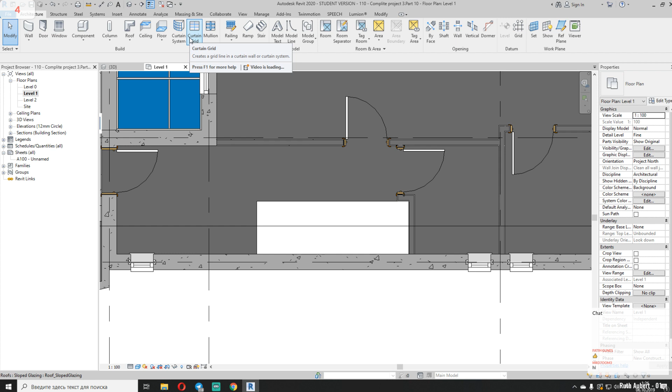And yes, you'll ask me later, I'm pretty sure — I will post this video on my channel. Yes, I will. So if you want to go sleep, it's okay, you can go, and tomorrow you'll see this video on my channel. What I want to check is this view, let's go to this view. Oh my god, we have a lot of work. And the other question — will I share this project or not? Yes, I will share this project, no worries guys. Later on, when I finish it all, you'll be able to download it for free, of course. I won't take any penny from you, no worries about that.

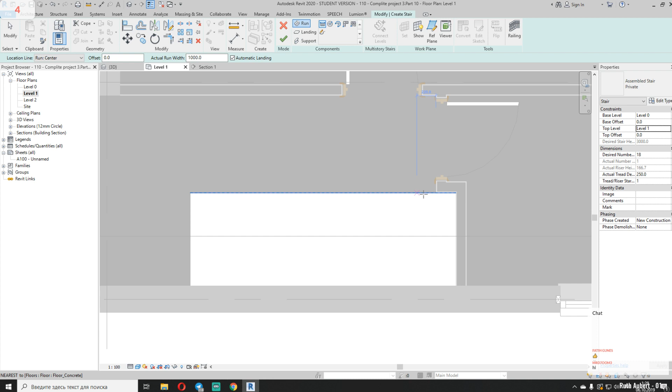Okay, from the 0 level, let's say I'll change to 150. From the 0 level to level 1, my stair should go. Okay, let's go to level 1. I'll find my stair, going from the 0 level to level 1. For level 1, I say it's commercial, private, or residential — which one? Let's use private. And I need to create — oh, as you can see, my stair is going from the middle. I need to use not the middle, but the left side or the right side, we'll see. Right side. Okay, I need the left side. Okay, here's the left side, and as you can see, my stair is pretty much big, I don't like it. Let's go to 3D, and as you can see, my stair is actually going — oh, I understand why, because my stair has the wrong position. This is pretty interesting, I need to solve it. Let's go here, I think it's going like that.

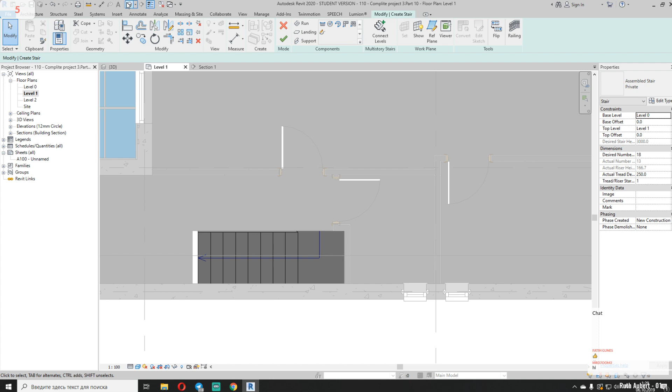Let's make it. Oh, it's a bit hard, but we will check it later on. I will go to 3D now because I want to see where's my stair. Here's my stair, but it doesn't look like I want.

Where's my section box? I want to see my section box. Right click, unhide. Where's the unhide and view element? Let's see how it looks, because I don't remember this building already.

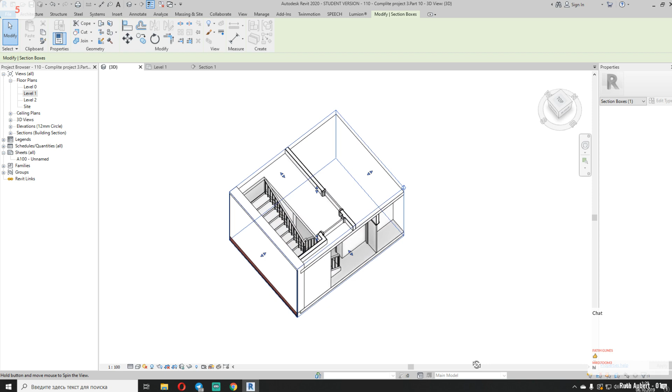We've already been doing this building for a long time. I found it. Okay, so it's not nice at all.

As you can see, here is my wall, and actually there's not enough space for this stair. It should be just straight. Oh, it will be pretty high. Anyway, I will do that.

Where's my stair? From that side, where's the left side? From 0 to the 1, and from this part to that part.

So how many stairs do I need? You cannot see because it's the same color. I need 13 stairs, yes, from that part to that one.

Let's go to the section. Actually now the rise is pretty high. Let me check it. Rise now - no, it's okay, it's not so much. For a private house it's not so much. I'm thinking it's really huge, but it's not.

Okay, I need this riser. Okay, like that. Done, we did our stair finally, and it looks not bad.

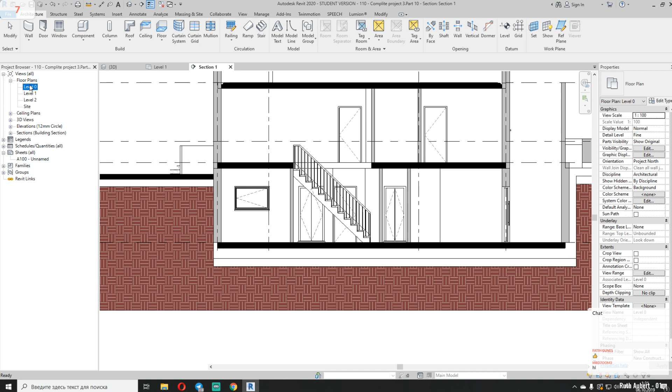Let's go to level 0, and as you can see here I have something like a plan. Actually this is a drafting plan from the last version of my project. I spent maybe 1 week on it, around 1 week for all these plans and design everything.

And we will do something like that. I won't copy it, we will just do something similar. Okay, here is my level. As you can see, here is level 0.

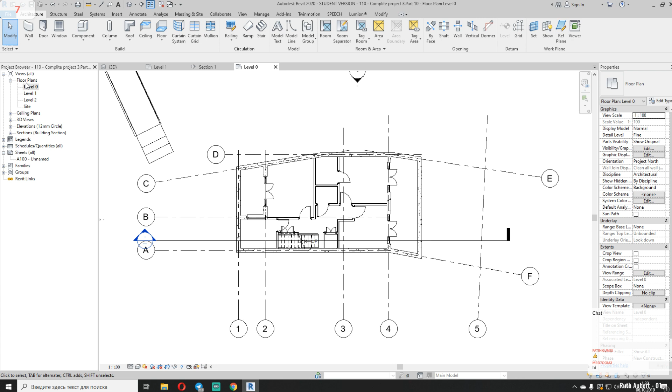First thing I want to do is create a new type of plan, because as you can see now all my plans are floor plans 0, level 1, level 2, and site. And I can't put this on my list because this is a working view. I want to create a design view or views which will go on my list.

So let's right click here, duplicate view, just duplicate, and I'll rename this view. I'll call this view level 0 to documentation.

I will copy this view too, without detailing, and rename it to documentation. You have a lot of ways to do that, but I don't want to spend time. This is a small project. I am working alone on this project, so I can do whatever I want.

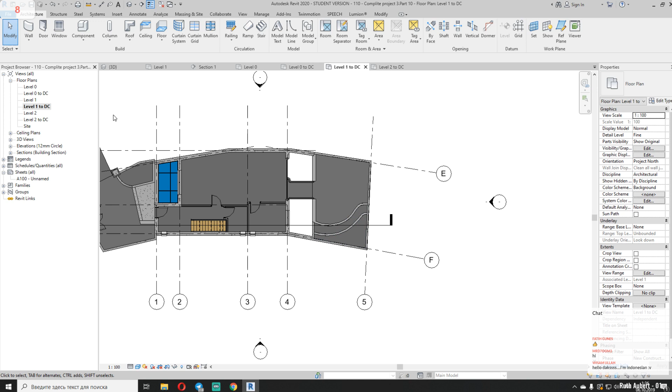This is not documentation. Level 1, let's go to level 1 and I'll show you the tricky way. As you can see, when you're changing these grids, it's changing everywhere. But on level 0, I want to change it more closely to my plan. How can I do that more on the right way?

Just select your grid, uncheck 3D, and now change position. Now it will change only in this view, nowhere else. Let's see the difference. As you can see, it's still in the same position, but here it's more closely.

I'll change my scale from 1 to 50, because this is pretty much better for me. The same thing here, I will select all of them, or just one by one - 2D, 2D, 2D, and 2D. And I'll change position of that, and the last one.

This is much better. I don't know, this is actually about the taste, but on my taste I like that one. But you should follow the rules of your government, of course, when you're doing documentation. Okay, we did it.

Let's now work with the graphics. We have a lot of work with the graphics, as you can see. One thing - I should do something with this door, because this door now connects with that door, this is so bad. We should do something with that. And as you can see, we don't have enough space on this side, so we should do something here too. Let's start one by one.

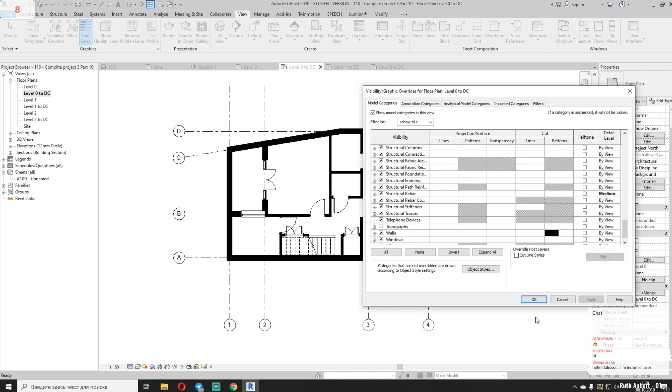Okay, all the walls which will be cut - our walls are cut. The lines we will leave as they are, but patterns will be black. For patterns, I want to use the black one, like this. Let's say okay, let's apply it. And as you can see, now everything is black.

Now I will go to graphics and select smooth lines, because now it looks nicer, more professional. Okay, so as you can see here I have the lines, but I don't like the lines because I know here will be dash lines.

So what we're gonna do is change these lines too, but we will do it later on. First I want to change this type of this family. I will go to edit family. Let's see the floor plan of this family. I will close everything because I don't want to see anything. And I need 30 degrees of this.

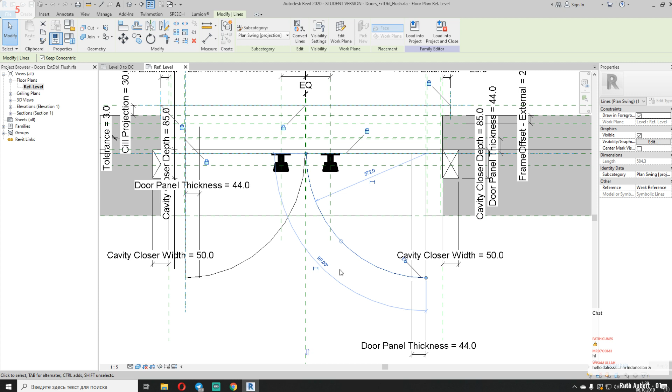Where is that? We should find it - 30 degrees, I cannot find it. 45, I need actually. Where is this line? Line is here.

Okay, I need to create something like that, but how can I control it, because I don't have any controls here. I don't like the standard families really, because you cannot do anything with that. You should create your own, it's much better. Okay, with degrees, oh my god, trying to find something here, it's really impossible.

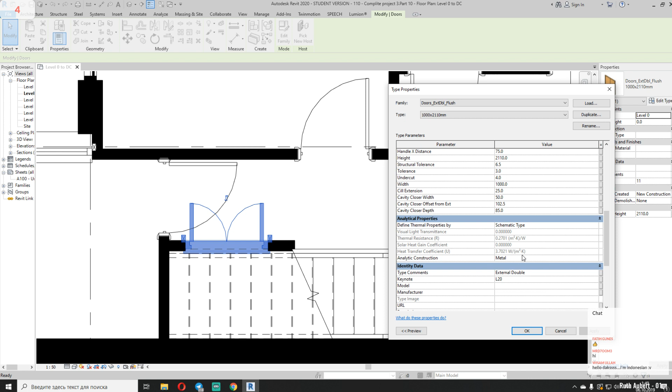Let's see what options we have. Actually, we don't have any options. I have the other options. I can make it like that, because this one is so terrible.

Okay, let's see what's going on here. Everything alright? Everything alright, I think. Yeah, everything okay. So now we should create the rooms here, because we don't have any rooms yet, as you know. I will go to architecture, find the rooms, and create the rooms. And as you can see, I cannot create the room.

As you think, why? Because I cannot see my closed boundary. Only here.

Let's see why. Here is level 0. My room, from level 0, limit offset 3000 millimeters, base offset 0 millimeters. Okay, so I don't need any tagging. Room placement automatically. And room placed was only one.

Hola amigos. I hope I said everything right.

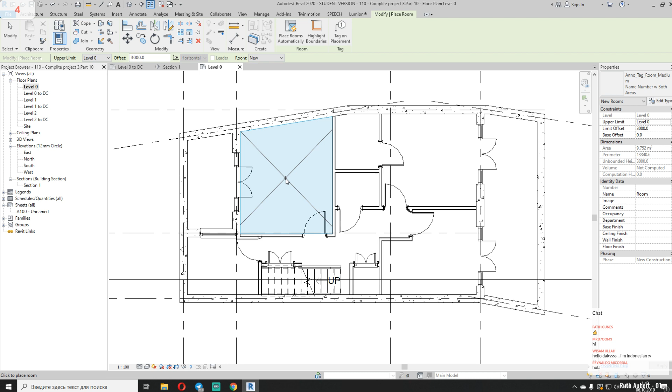So one room, the second room, and let's create the rooms. And here one more - okay, now we have the rooms. Let's go back to level 0, documentation. Now I will go to the color scheme.

Actually, I don't like the color scheme. The color scheme is only to check what's going on with my rooms - room names. As you can see, now I have only one room, of course I have only one room. And let's name this room.

Which rooms do I have? I already forgot. Let's check - okay, here I have the bedroom. Let's call it bedroom.

The right store. Here is the store, here is the ensuite.

I will not use any families, I mean like toilets or something else. It's not about the toilets or something else - we're just working with documentation only today.

Bedroom here, let's find bedroom. Actually, we already have the bedroom, just check it out like that. Here is one more bedroom.

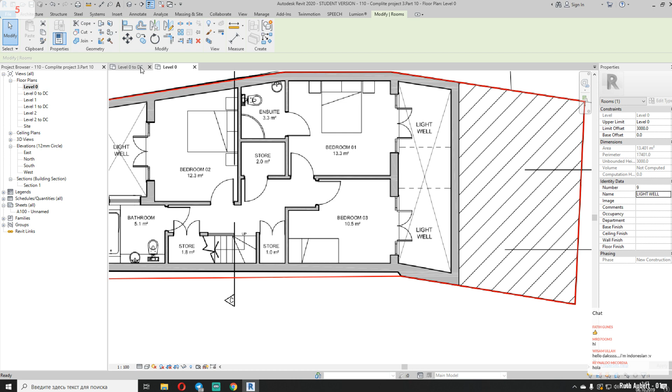And the other side also. And let's say I'll put it here. Yeah, room bounding. And let's make it light well here.

Okay, we did it. Actually, I don't need the color scheme, I don't like it at all, but we will make it more professional - when it's so colorful, I know everyone doesn't like that, but we will make it a bit more professional.

By using Pantone - let's use the Pantone, and I need to use these colors. Okay, like this, maybe even gray. I want to just use the gray colors. As you can see, we have a lot of different gray colors. I will use this gray color.

For that one, I will use cool gray. And just use some gray colors.

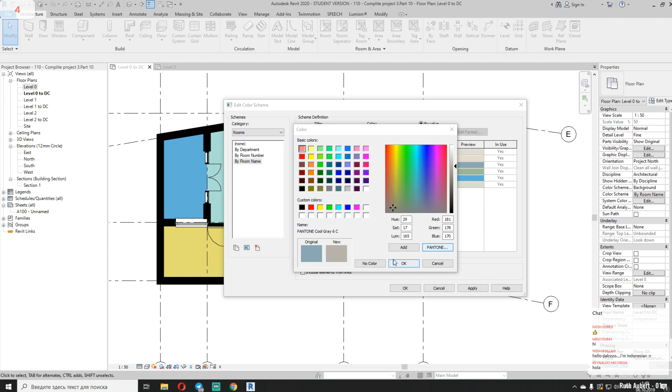It's really a better one, because the colors actually just indicate where your room is, nothing much. And actually professionals won't use the color to find your room - they will use the ID of your room. That's it, you won't see what colors they're using. Is it purple, or white-purple, or black-purple? No, they will say, this is room number something something.

Okay, I understand, thank you. And one more - let's make, yeah, why not this one?

Okay, as you can see, it's pretty much the same. I will change it to this one, and let's check it - number 4, let's check it. Everything different, as you can see. Let's apply it.

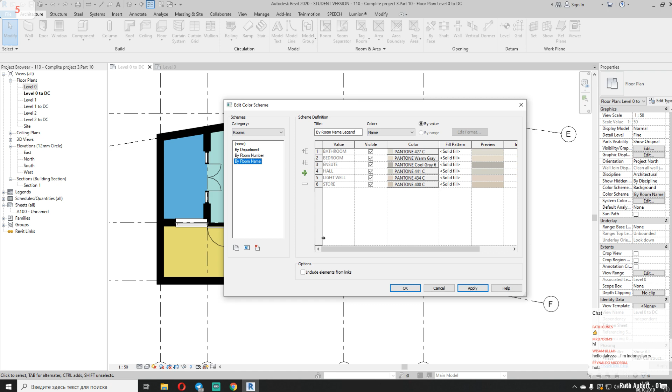We did it, this is the room name now, and we will do it by room name. Yeah, actually we can make it lighter than now, but it's not so colorful like it was before. I don't like colorful, as I said before.

Maybe I will change it later on. I want to make it even more lighter. Okay, so we're done with that.

Let's make the tagging. How can we do the tagging? We can create one tag for everything, or we can create one by one. Actually, I prefer to create one by one. Let's use the tagging room, and we already have some tags in our Revit.

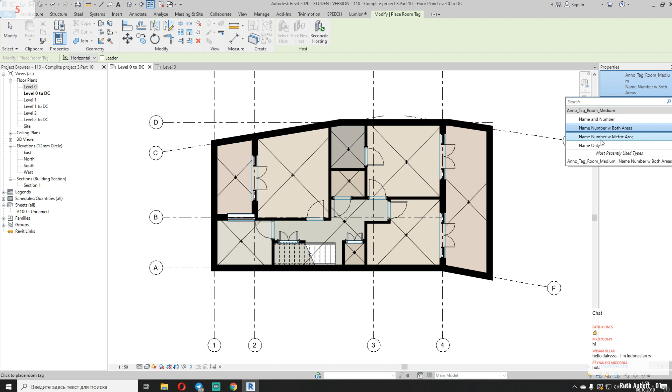Let's see how it looks like. Okay, where is my number? I cannot see. Here is number. I want to see the number of my room. But here is square feet. I will use that one, but I will change the square feet to meters.

How can I do that? As you can see inside, we cannot do that. But if we go inside to the family, here is my square feet. Here is my meters. I don't need square feet, I'll just delete it. Let's load it again back to our project, override, and now everything is alright.

But the number of my room, I don't like when it's starting from 1. It should start like, for example, level and number. Let's select that, and let's go inside to my

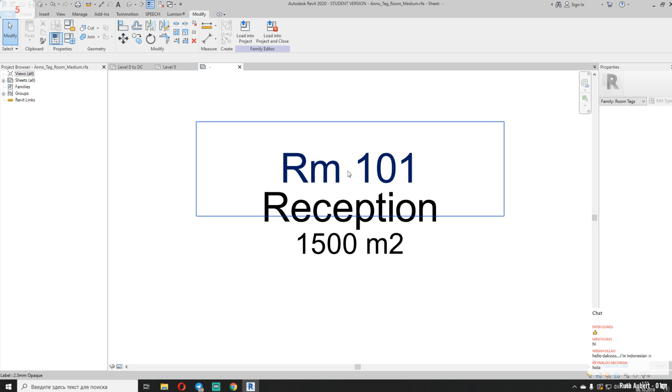family. I will click on my room number, and I will go to edit label, and you will find here the number. As you can see, we have the sample value and the prefix.

As prefix, I want to use my level. Let's use the level, I will say here will be my level. Okay, here is the level suffix, and I don't need any spaces between that. I want to use only that symbol. Let's say okay, as you can see, it will be something like that.

Let's load it inside to the project, overwrite the existing one, and as you can see now it's much better. Level 0, number 1. Okay, let's improve it again.

Nothing changed because this is my mistake. I will go back to here. Okay, here is starting, and it will start from 0. Okay, let's load inside to the project and override exactly.

Okay, this is much better, and I don't want to use this white background. Let's change it, and this is done with this family.

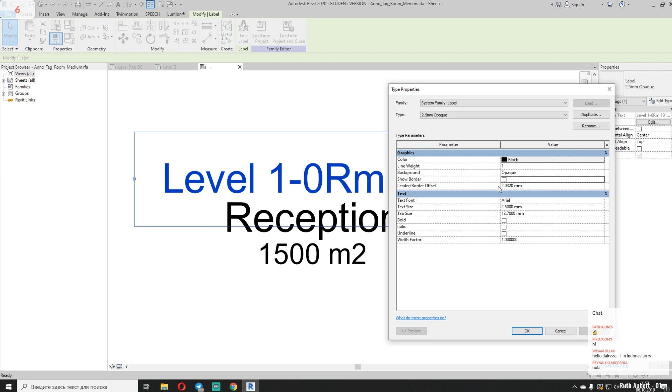Where is this white background? Show border, I don't want to see. No, it's not show border. Background transparent. Let's load inside to the project, and done.

This is what I want. As you can see, level 0, number of the room 01, bedroom, and square meters. Pretty awesome. And let's now create this room tag for all the rooms.

You can create like that, for example. Once you select that, I forgot where is this label. Give me a second. Tag rooms, I forgot where that is. Doesn't matter, let's put it manually.

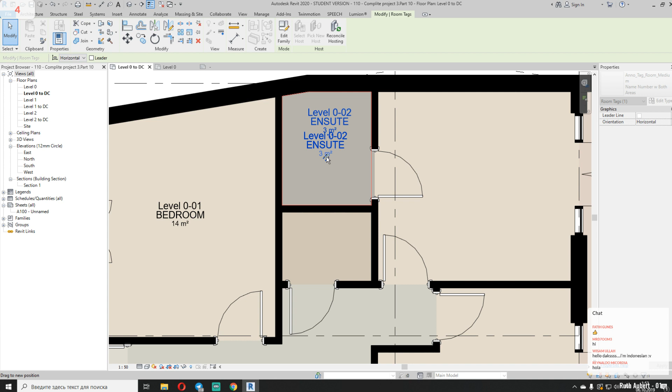Okay, here is my store. Here is my room. I prefer to do it one by one, but because maybe somewhere I will get some problems. I mean the sum maybe not right, the spelling, maybe the square meters will be not right.

So that's why I'm doing it one by one. When you have a small project, I prefer to use manual things, I mean to do everything manual, because you have small projects.

Okay, as you can see, now our plan becomes more pretty, right? Because you can see where your room is, you can see the square meters of your room, everything correct.

And now we need some simple sizes, not like everywhere, like students like to do. You know that, like students doing like that, everywhere should be size. No, don't do like that, because this is really so stupid.

You should have the sizes, only main sizes, between your, for example, your grids, of course. Here you should get the sum size, and as you can see, we cannot now put to here, we should use this grid. Okay, this is calling like overall size, so everyone will understand approximately the size of your building.

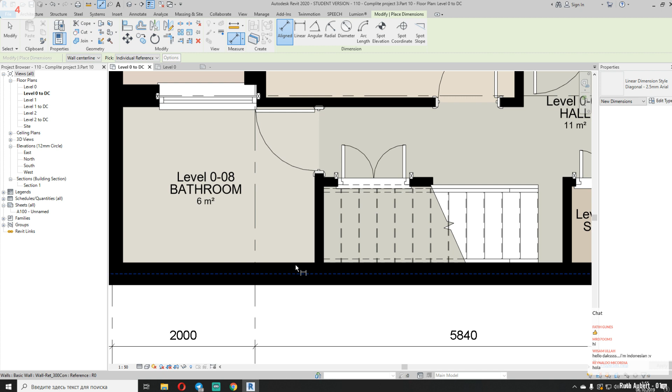And we cannot create from this wall to this wall, as you can see, and we need to create some internal sizes, only to understand how big is, for example, your room. Okay, as you can see, here I will do for the internal wall, but try to make all your sizes on one line. As you can see here, we cannot use that wall, and that's why I'm using that.

Let's select it. I don't need this one. Okay, and what I don't like actually right now, first I don't like this white color.

Let's select my dimension, and I want to see the opacity background. Where is my background here? Let's find the background, the text background. I want to see transparent. This much better. If you don't like this, you can change, of course, to some opaque and make it white, for example. But I like when it's transparent. And I will show you a bit some difference later on.

So let's create first our horizontal one sizes. For example, I want to see the distance on my corridor from this wall to this wall, from this wall to this wall. Don't do everywhere, just main sizes. Okay, here and here. No, I don't want that. And that one.

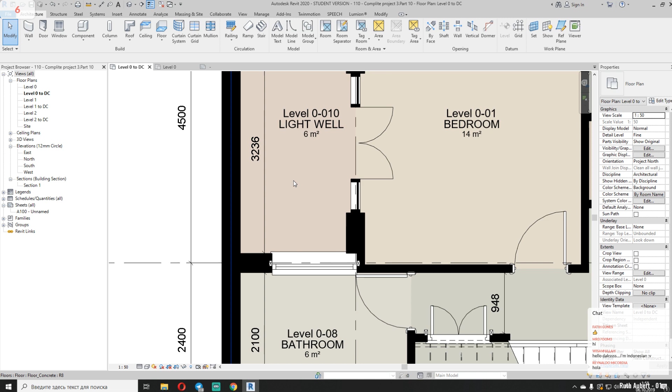As you can see, sometimes we get the so bad numbers like that one. Yes, of course, you can make it tricky, like in AutoCAD or like in, for example, ArchiCAD, but I don't prefer to make it tricky. Really, don't do that. You can make, for example, a bit rounding. For example, when you have like 1 millimeter or 2 millimeter, you can make it rounding.

I will do the round. Just I will go inside to this dimension text. Here you will find the units format, uncheck it, and we will make the nearest to 10. Let's say OK, let's apply it, and as you can see, now we get much better numbers, but we are not tricking because 4 millimeters it's not will change anything. For example, your plasterboard it's 25 millimeters, but you're tricking only 4 millimeters, so it's not bad.

But the numbers now looking really much. Actually, this building it's reconstructing, and that's why on this building it's never will be like 3100 millimeters, because the building reconstructing, actually they are already wrong. It was built before AutoCAD was born. As you understand, it's everything was measurement by hand and rulers, manually I mean. Okay, we did it.

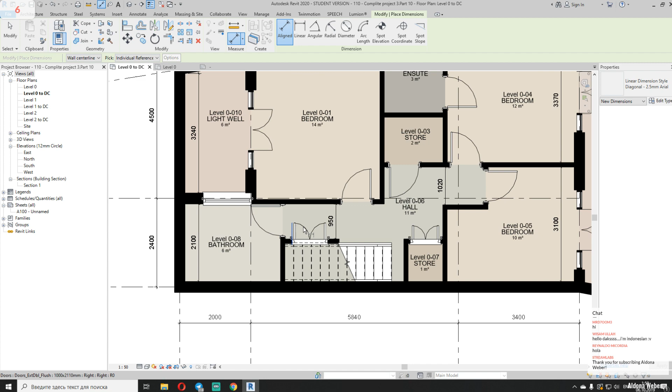Let's create some more dimensions, but as I said, not much, just a bit. For example, this store we don't need. As you can see, it's 1 meter by 1 meter. Where we need the dimensions? Okay, we need dimensions, I think, on the light well, somewhere here, and maybe we need somewhere here too, like that. Maybe I want more here.

Okay, we're done. So we have dimensions, we have our stair here, but actually what I don't like in my stair, I don't like the stair have the left railing. I will delete it, I don't need it, and I don't have enough the space to the people. Here I should have at least 600 millimeter, but as you know, here I have only 300. I need twice more. So let's make it, because it's really bad.

I will say I need 11. Oh, pretty easy. I need 11. Let's go inside to this stair. I'll select the stair. Okay, done. Now it should be enough.

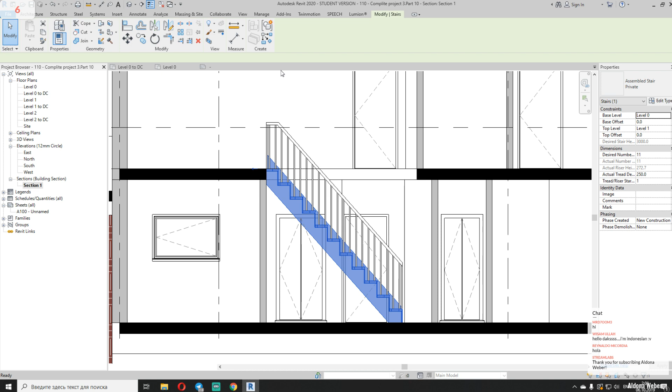Let's go to the my section view and let's check it out. Yeah, and the height 250, so it's not bad. It's not good and also not bad. My grandma cannot use this stair, but I can.

So this is building reconstructing. As I said, it was the wine storage. So as you understand, for the wine storage, you just keeping only the wine bottles here and nothing else. But now it's bedrooms. Everything changing.

Okay, we did it. But one thing, as you can see, what I like actually, the internal dimensions I like when it's smaller than external one. And we will create now new dimension.

We will duplicate it. As you can see, we don't have the bigger one, we have only 2.5 millimeters. We will duplicate and we will say this is Arial 4 millimeter diagonal. Let's say OK, and let's change 2.5 to the 4 millimeter, text size to the 4 millimeter, and let's make it bold. Let's say OK, and as you can see, now it's much better. I don't know, for me it's much better. So now I can see overall size, and after that I can see what's going on inside.

If you think I will spend a long time creating the same situation on level 1 and level 2, you are wrong. I will just create a template now. Let's create the template, and I need to create a new one. Just right click here and create view template from this view.

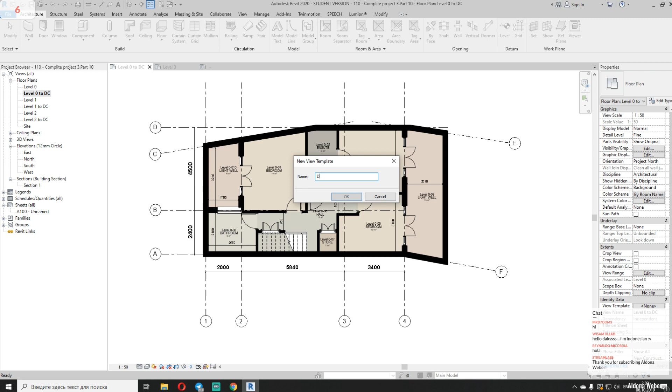This is our existing view. We will transfer this to the other levels, and we will call it documentation. Let's say okay, we will leave it as it is. Okay, and now there will be magic.

We will go to level 1. As you can see, it's pretty messy everything. Now we will apply here the view template documentation. Let's say okay. As you can see, now the graphic will come as we want.

Now we will just hide some elements. We don't need this one, we don't need that one. Hide on this view. Okay, and this one I will leave because we should work with this one.

Okay, and we don't have the rooms. Let's put... I don't have the room bounding for all external walls. My god, how come? How did I do it? Why did I do it? I forgot. Let's check. Yeah, I don't have room boundings for all my external walls. This is terrible. So let's place my rooms.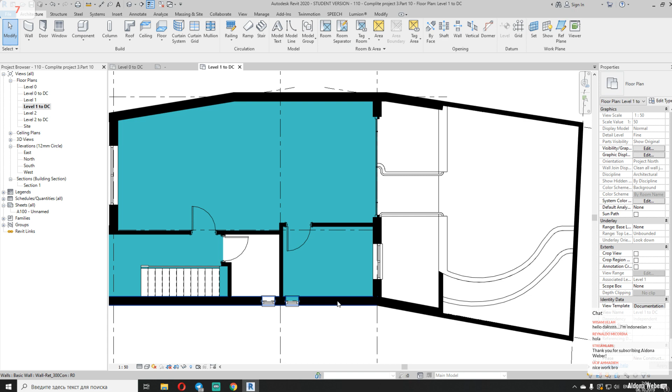One room, second room, third room. Thank you, I really appreciate. So, oh, one more here. Okay, this one is storage, I hope so. Let's see level 0.

Where is my ground floor? Here is my ground floor. Okay, here's the entrance hall. Let's go here. Where is my X1? Again, I cannot see my room. Where is that? Just click on the room and you will see where our intersection is. Okay, it's here, and this is the entrance hall. Okay, here's entrance hall. Let's say okay.

Oh, magenta, I don't like this color. Here is the toilet for our guests, a special toilet. We will call it just WC. Study, so this is a working place.

Okay, and we have kitchen and living room. Hey, where is my X? Kitchen, living room. Okay, we did it. And as you can see, because we have here different names for my rooms, we have these pretty ugly colors.

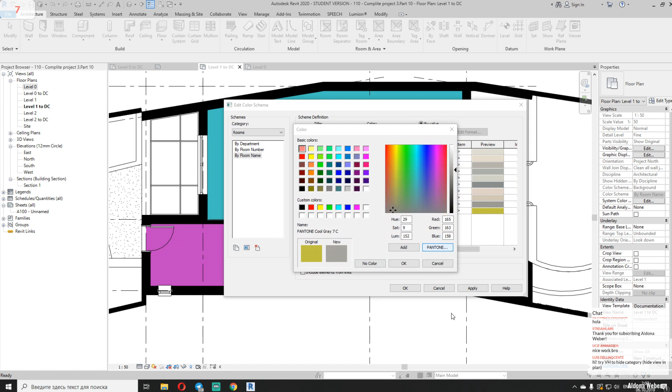Okay, done, so we have the different colors. Yes, we have the different. Let's say okay. And yes, I like those colors, but actually it's a bit dark. But anyway, this is much better than before.

Maybe, let me spend a bit more of your time guys - I wanna make it a bit lighter. Okay, let's make it like that. This one I will make more lighter. Yeah, I like minimalistic design. Okay, here is much better, yeah, much better.

Now I need the rooms. Let's place our room - oh no, sorry, now I need the text. Where is our text? And as you can see, this really looks nice, our text, without anything extra. Don't put everything on your text, just put only the main information. As you can see, only main information, and it really looks nice.

Okay, so what we're gonna do next? Next, as I said, we will use dimensions, and I will use 4mm for the external one. Okay, from this one, and I should find this point.

I will try. This is actually a bit hard to find. It's here, I'll put it a bit here. As you can see, it's a different direction.

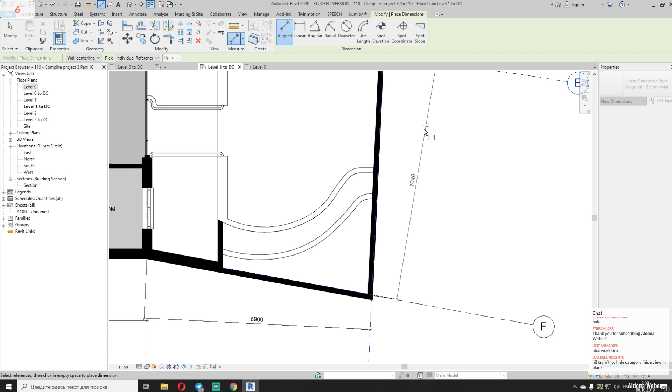Okay, this situation here is a bit different, and as I said, there are some right ways. For example, now I'm changing this grid manually from 3D to 2D, but you can change it by scope box. You can do that, or you can change it on the list, or do it manually.

Choose your variant. On my channel you can see all the variants, just go and check it, you will find all different ways. For now I'm just using the simplest way, but it's not the best way. Believe me, it's really not the best way. I can say this is the worst way.

Anyway, it's something. I'm just changing it to make it a bit closer. I don't like when it's so far, you have like a small plan and you're trying to place it for an A2 list, like trying to cover all your free space. Don't do that.

If you want, maybe later on I will show you my school projects, my first work projects, if you want.

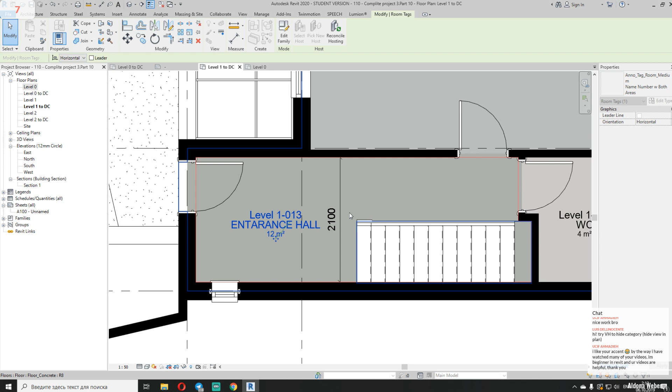Let's use dimension, and now I will use 2.5 millimeters. As you understand, we need to show the distance in our hall. Let's show it, because our client will ask, 'oh sorry, can I know how much space I have here?' You will say, yeah, of course, check my dimensions.

This is pretty cool, right? Okay. And here I need also dimension, because it's two different dimensions between that one and that one. Here I don't need any dimension, and actually I need dimension on my bridge. Yes, here is the bridge.

Okay, pretty awesome, we did it. Let me think. Okay, done. So what we're gonna do next? Next, as you know, here we have an empty space, like a double story, right? I will show you.

Let's go to the 3D. Yeah, here, as you can see, we have here like voids. Of course, we should show that this is voids.

Let's go to our dimension, and now we will use the lines. Yes, you should use the line. I will use actually the annotate line. Let's go to annotate, and we will find here detail line. Detail line we will change to the dash line. Where is my dash line, hidden line, and dash line? So the hidden line actually is the dash line, let's create it.

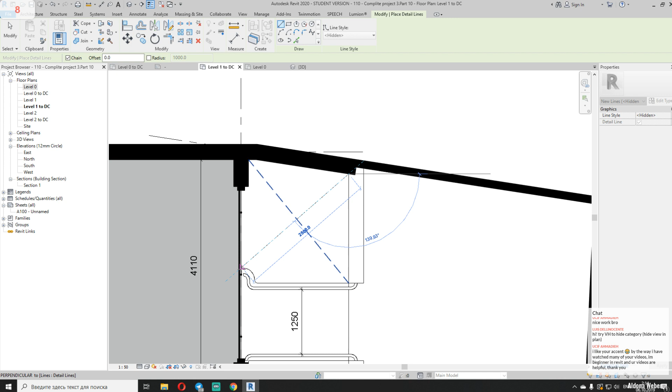One and the second, because we should show this is void. Okay, now we understand here is the void. It's not bad. Where's my glasses? It's here. Okay.

Actually, now I need to use some texture here. So what can we do? As Luis said, we can change it by the visibility graphics of this thing, or we can just use the right click for now. I will use the right click and override graphics. Why? Because I have only 2 objects like that. If you have more objects, like more than 5 or maybe more than 10, try to make filters, use visibility graphics or something else, because you can forget about your elements.

Okay, so what I'm doing right now, this means I have few objects and I can change the visual graphics on my view. Okay, surface pattern, I will change it to the grass. Where is my grass? I don't have any grass here. I have something else though. I don't want to use the concrete for that.

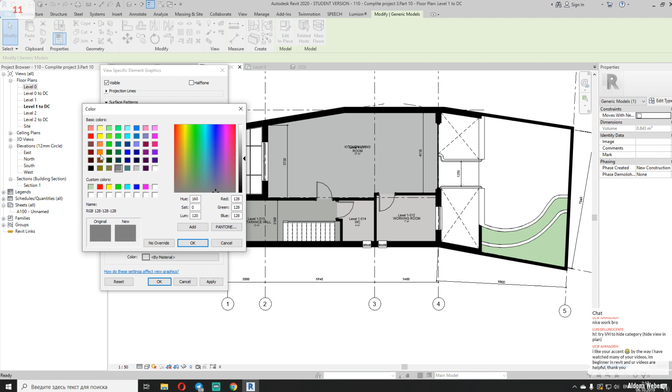Now it's color. Now this color I have on my pattern - right click, override the solid fill, and this color. No, I said this color. Okay, not bad.

Now let me think about the external side. We need to change it to actually all my floor which will be outside. So this is a road and bridge will get the same pattern, and now we will use the filter.

So let's go to the view, let's find here the filters, and let's create the new filter. We will call it road filter.

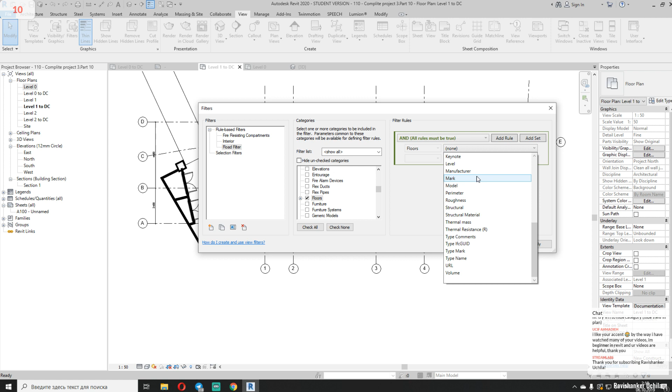So we need now use the floor. Let's find the floor here, the floors - if it will be floor, any floor, just give me a second. If it will be floor, this is AND rule. Okay, now let's go to the view template.

Where is our documentation? I will go to the graphic. I will add here the filter, road filter, and if it will be roads, the projection surface pattern will be concrete. Where is my concrete? It's here, and I will leave it as it is. I'll say OK, I'll say OK. And as you can see, now we get concrete.

But we have the problem - we get concrete inside also. Why? Because I didn't make some rules for my filter. Let's make it road and bridge only. I will go back to my filter, and I will say if this is road, family name equal to road.

Let's add one more rule - is it floor? No, we need one more rule, or it will be family name equal to the bridge. And now it's not working. Oh, I didn't save it. Oh no, I saved it. Oh my god. Actually, this will be AND, and that one I will create just a new set.

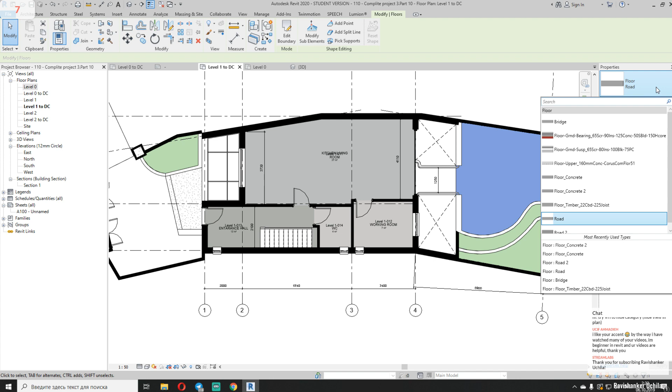Interesting. Floor - this is floor concrete, this is floor road, right.

Visual graphic. Oh, view template, manage, documentation, visual graphic, filter, visibility - unapply, apply it. So pattern, it's working. Edit filter, equal - actually this is equal to the road. Let's say okay, let's say okay, let's say okay. And again it's not working.

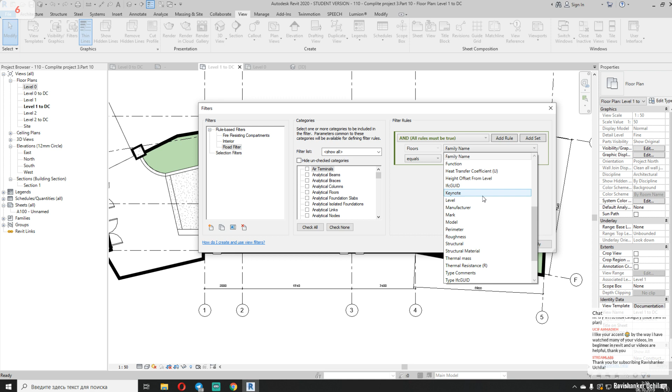I know it's not working. Road, family name, assembly name. Actually it's not family name, this is type name. This is my mistake. Yes, sorry guys, it's for type name. Sometimes I really forgot about that.

Here is actually a road 2, so we should change now our filter constraint to contains, to road, and we should add one more rule - add rule, type name, contain, and bridge. So now everything will work.

Yeah, now everything's working. As you can see, now our bridge also has the concrete color, and our road also has the concrete color, and that one which is calling road 2 also has the concrete color. But now also this column has concrete color, so this is pretty worse. I don't want to make it that color.

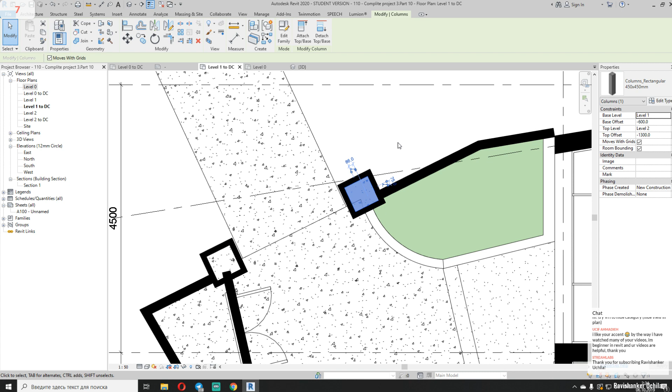And as you can see, we get here the problem with the wall. Let's see what's going on with this column. I get it - was what's going on with the column.

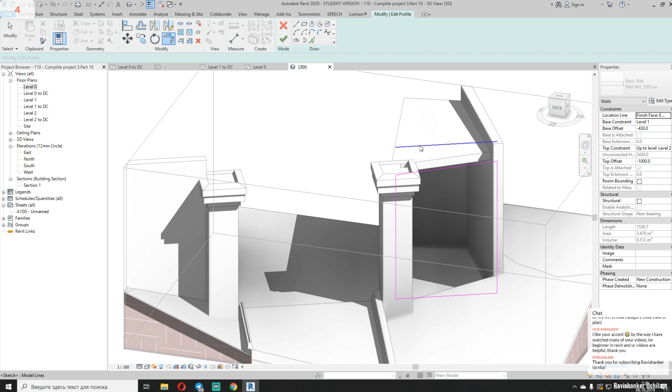Okay, actually what we can do is this column - that one will go till here. Align. I said align. Okay, if you don't want, just reset this profile and attach to that one. Okay, and now align like that one and just trim it. Unjoin elements, and that one just connect with that one.

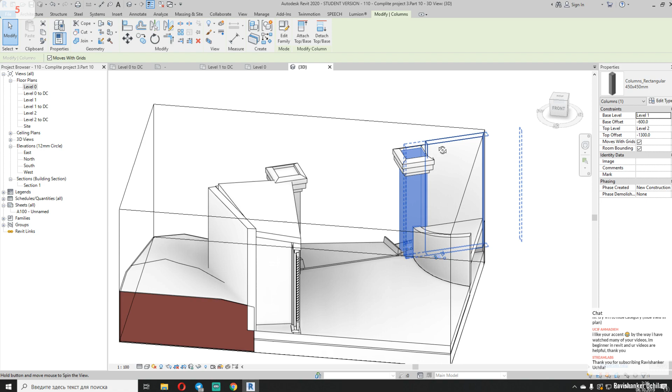This is much better, this is what I want. Yeah, as you can see, when you're working with the documentation, you still have some problems with your geometry. So it sometimes happens. I don't think this is a problem, but anyway, you should work with that.

Okay, with the edit material, we don't have any material here by category. I will change my material. Oh, here is the air. So this is so bad. I want to change my air to the concrete.

Okay, and that one I also will change to the concrete. Done, let's go back to my level. Now we have here something like that, and here is concrete. Yeah, because this is concrete. I will leave it as it is.

Okay, done. As you can see, we already get one thing, and now I want to work with my glass one. So we have a few ways how we can work with the glass. I will select this panel, and we can edit in place as you want, like that, because this is actually the standard panel.

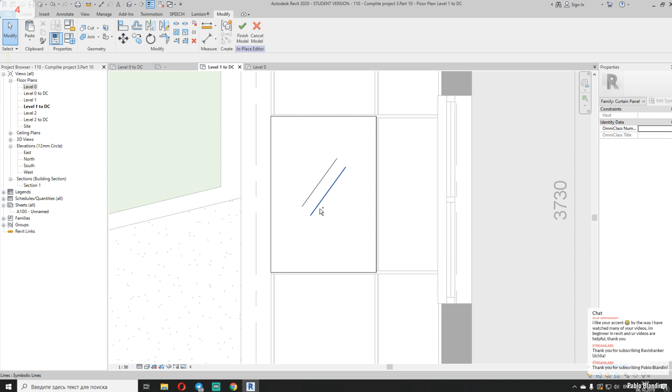I will create some model lines. Oh sorry, actually not model lines, detail lines for my symbolic line. I will create one line, copy that, like that, and copy one more time like that. I will select these lines and make them twice smaller.

Okay, I said all of these lines I want to move. Okay yeah, this is what I want.

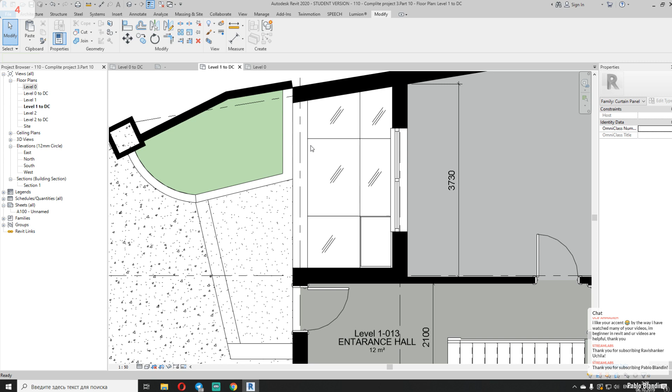Because here I have the glass, yeah, I can create the family, I can paste it inside the family, but as I said, I have a really small project, so I can control everything manually. Don't put it everywhere, just put a few in one place. Like this, like that, and one more like that. Okay done, now we understand here is the glass, right?

Okay, we finished with that. We have this level already done, but we will also come back here to place some dimensions of our level. Now I want to save, of course I want to save, and go to level 2. Let's go to level 2, and as you can see, here is our roof.

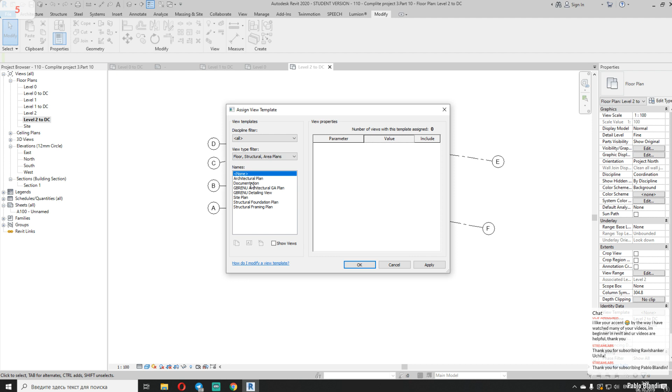I will hide this one, I will hide these elevations on this view. Okay, and now I want to apply here the view template calling documentation. Done, now I will transfer it to 2D.

I will hide this number 5, and make it closer. I think we need only one sheet because we don't have a lot of square meters, I mean, and we can put it on one sheet. I mean all documentation will be on one sheet, maybe, I don't know yet. We will do it later on and see. Let's make it close.

We will do all the tagging today, no worries. Okay, and here as you can see my wall, it's not black. Why? Because as you understand, it's not cut, that's why. I don't like these white lines, so what I'm gonna do, I will change it instantly and make it hidden line, like this one. Only 3 of them, this one I want to hide. I will use invisible lines.

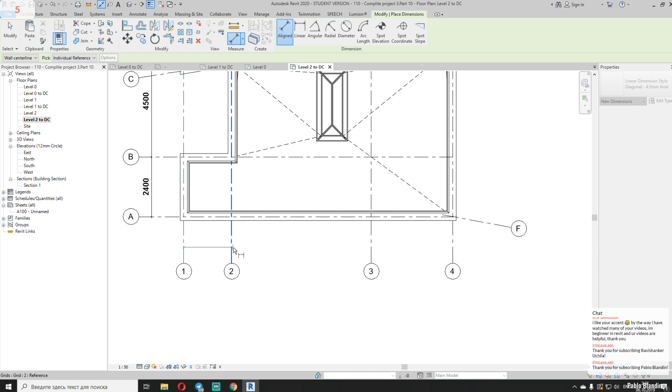Okay, so much better, because then my water will only go on those sides. Okay, let's use dimensions, 4 millimeters from this line, this line, and this line. The same thing here. Now we need the internal dimension. No, I need from this side, that side, that side, and that side.

Done, don't do much. Okay, not bad. And again, here we have the roof, right? So as you can see, floor, concrete, blah blah blah.

You can create one more filter, or you can do it manually, up to you. If you want, you can create it manually or with the filter. I will do it manually because I only have one roof. Let's use override element, not solid, sorry, we need concrete, the gray one. Let's say okay, and done. Here's our roof, pretty awesome.

If you have a situation like that, when you have part of your geometry and you want to hide it, you have a lot of ways to hide it. But a better way is going to the view, here you will find area plan - oh, not area plan, sorry, what I'm talking about, plan region. Let's create here the plan region, but don't forget about plan region, where is that?

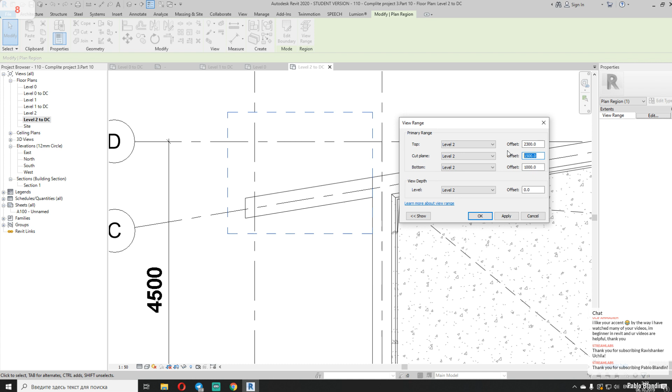As you can see, nothing changed, but if you select the plan region, you have here the view range, and you can change it. I'll say here's the view range: bottom side will be level 2, offset will be 1000 millimeter, cut plane will be 1500 millimeter, and top side will be 2300. Nothing changed, so we will increase it.

View depth, level 2, 1000 millimeter. Oh, it's so big. Wow, voila. It's a really big one.

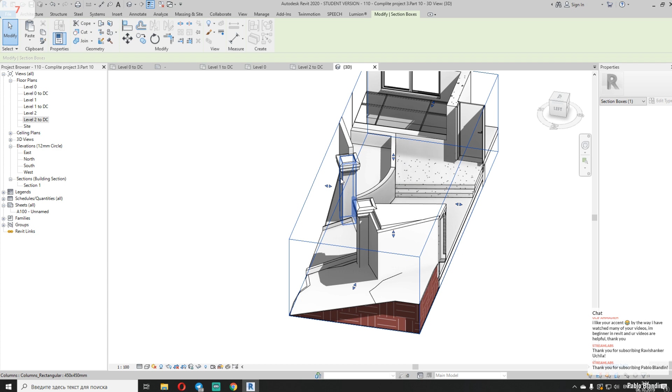It's really so big, this wall. Let me check. No, it's actually under that wall, but why can I still see it.

Really interesting. Parent, no, it will be level 2. We will see unlimited, and here is also unlimited. Yeah, why I can see, because this union wall, and we cannot cut only that part. It's my mistake, so forget about this way. You cannot do like that because you have the union wall, so it means it's one big wall. When you have a situation like that, you cannot hide it, as I said before.

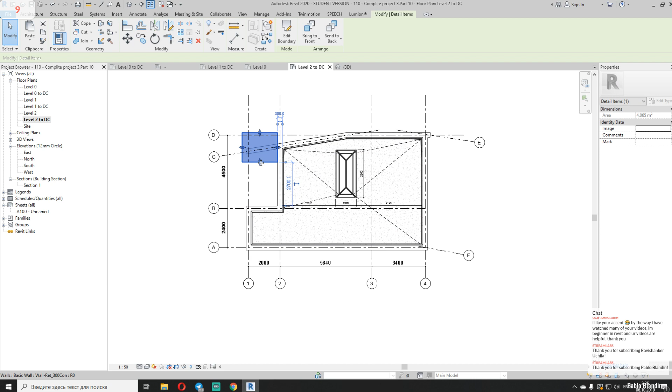So you have other ways, like annotate, and here you will find the region, masking region, so this will work properly, but I don't actually like mask region. Anyway, where you need to do that, you can do that. Let's go here, and I will change these lines to invisible lines. Okay, so done, you cannot see anything. But don't forget about this region, okay? So we're done with that. As you can see, we get a clear plan without any bad details.

Okay, let's go back to level 1, and we will work now with the floor. Later on we will go back to level 0 and level roof.

Okay, so what we're gonna do, we need now spot elevations. As you can see, here's our spot elevation, and as you can see, here's a lot of different spot elevations. Here I have the tag, vertical, whatever you want, everything. So let's find what we need. Crosshair project, actually I don't know, this is the standard one.

Oh, Trillion Center, let's find it. Plan, yeah, this is what I want. Here is 3000, but what 3000, you cannot see. Okay, we will put it here, like this one.

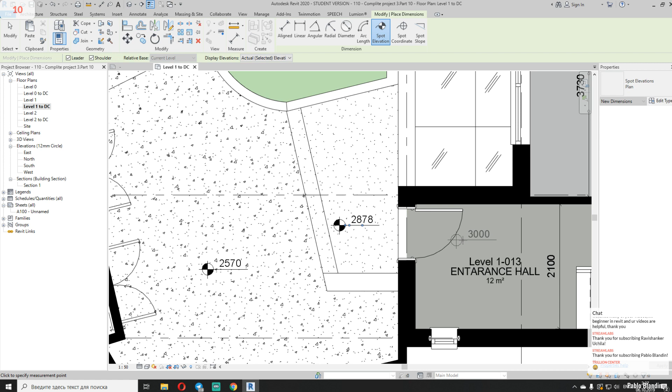Actually, it's a bit strange. Okay, here we will put it. Where's our entrance? We will put it on our entrance, maybe somewhere here, like this. And again, as you can see, now we get the white on the background. But for this one I will leave it as it is. Why? Because...

Oh, greetings from Thailand. This is pretty awesome.

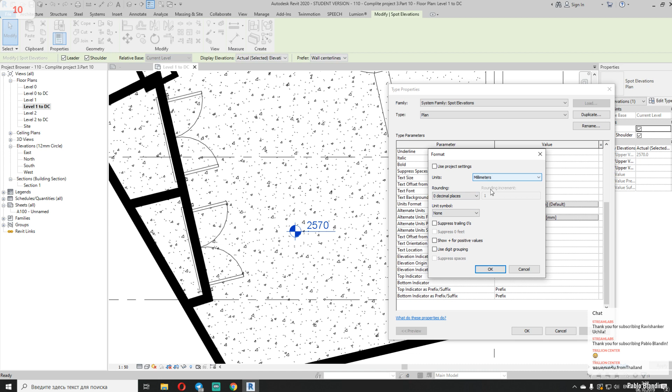Here is 3 meters everywhere. Okay, 3 meters, 3 meters. So I will leave it, but here I will also place 3 meters. Okay, so now you can see everywhere 3 meters. But I want to change it actually, 3 meters, I don't actually like it. Let's go to our 3 millimeters. I want to see the symbol millimeters actually. And I will make it a bit smaller. Let's make it 1. Yeah, this is much better.

So, and I will put one more level. You cannot see it, but now I will go to level 0, and I will put here my spot elevation too. I need only spot elevation here, and done. We will put one more spot elevation on our light well.

Why? Because here is our 0 and here is our 0. Just give me a second. Okay, done.

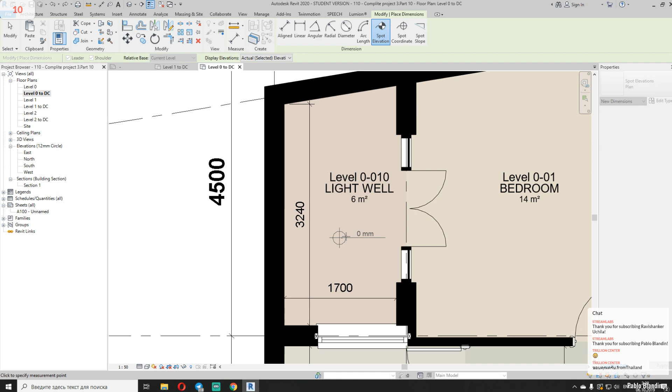So let's go back to level 2. And here I will use the slope, because we should show here the slope, because this is roof. Let's use that one, just on the line. Here is no slope, and here is no slope. Done. Now we can clearly see where our gutter is going, where our water is going.

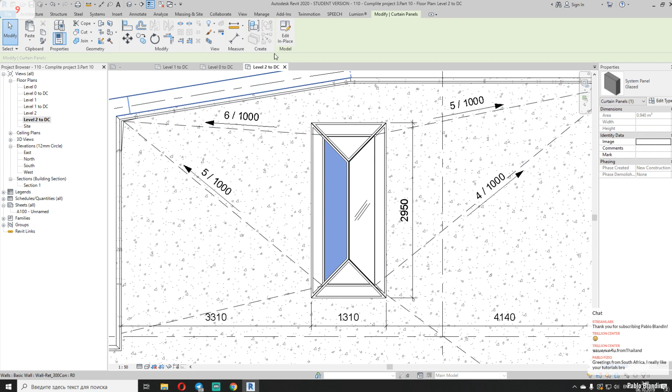Pretty awesome. And one more thing, I forgot about the lines here, because I also have the glass, and let's put it like that. Not everywhere, just for these glasses, like this. Let's save it.

And let's go back to the stair. Pablo, welcome, welcome. I'm doing everything for you guys, so but don't be shy. If you have questions, ask me, because now I'm working like with myself only. I'm feeling a bit terrible about that. Oh yeah, we will make the specification too, no worries about that.

Let's go to level 0, and now let's work with the staircase. I will go to the architecture. Here, oh, not architecture, annotate. Here I will find these tread numbers, and I will put our tread numbers here. Pretty awesome. Here is my tread numbers. As you can see...

Orientational vertical one, no, horizontal is better. The back, center, yeah, back is better. Reference, left corner, no, left corner right. Offset we will make 100 millimeter. Oh, it's too much. Maybe 1.2. 1.2, okay, this is much better.

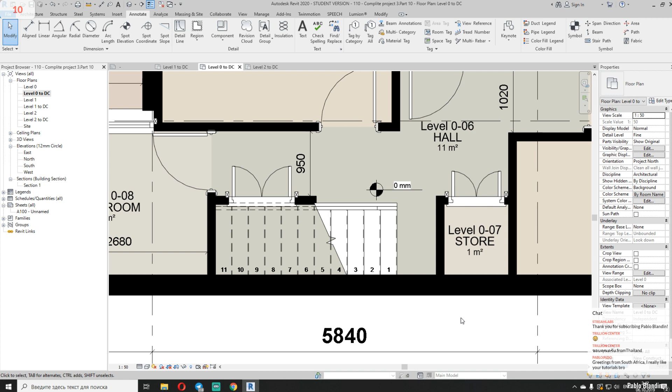Actually, I don't want to see this line here, as you can see. Let's make it invisible, only this line, and I will make invisible this line too, because too much lines, I don't like it. No one likes when it's too much lines. Okay, much better, as you can see.

Now we get the numbers. Let's go to level 1 and we will make the same thing here. Architecture, not annotate, the tread numbers, like this. Boom. Left one, 1.5, yeah, much better.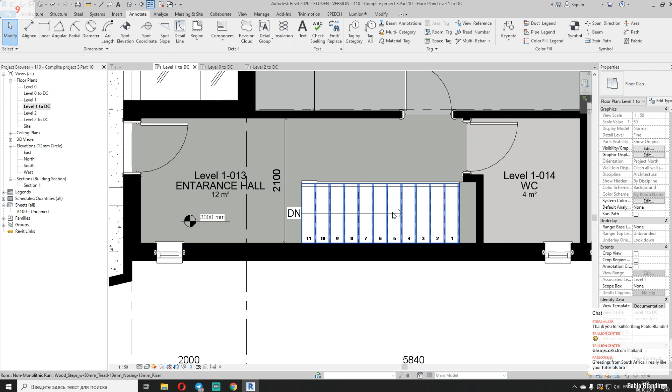And I need also the line. Where is going our staircase? Where is the line for the staircase? I forgot about that. Here, here is downstairs. And let's go back to the level, and here up.

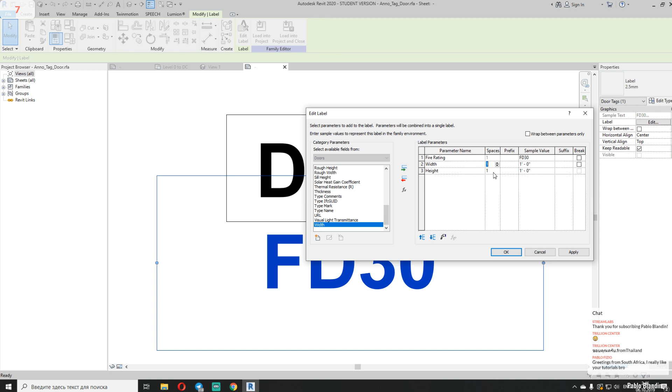Okay, how will it work? It will be like this, and actually it will go to here: 1, here 0, here X. Let's say like that.

Let's load it inside to the project. We cannot see anything now, but if I use this tagging for this other door, you will see the difference. Actually, you can see a difference, but you will see. Here we have the height of this door. Where is the height of the door? And the second parameter is here.

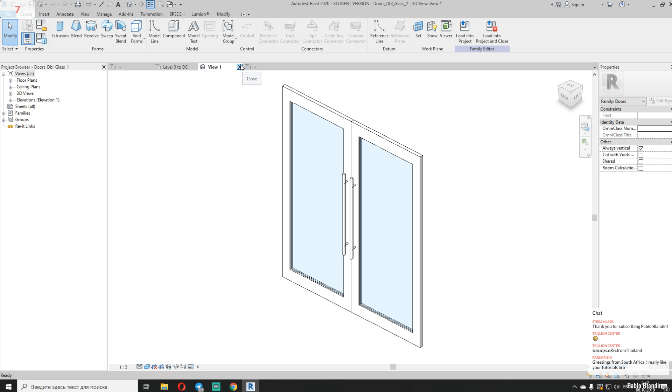Let's say I'll close the door. Yeah, you should get your own tagging, because when you're working with the standard one, you always have some problems. Yeah, it happened, we have... actually it's not working because it's in inches, but anyway. And the marker is working.

Oh yeah, here is the number. As you can see, it's working now, but I want to change the type of the data. Let's go here and make it the nearest 10, and here I will do the nearest 10 too. Let's load it inside of the project and override it. Yeah, pretty awesome.

So now we have this, this is door number 5, and as you can see, the size of this door type actually. So let's make it prettier. We'll make it more pretty than we have it right now.

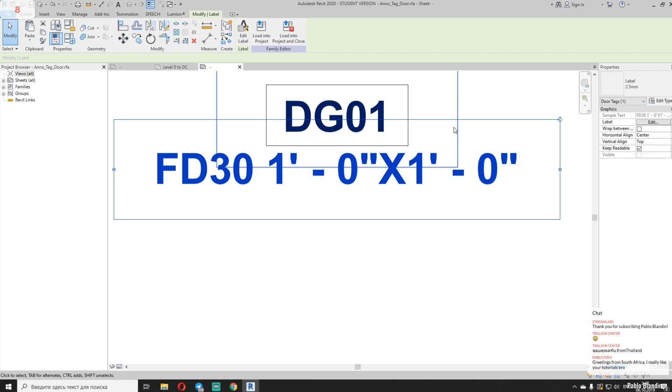I will change its dimension. I will copy it, and this will be 1.5 millimeters. 1.5. Let's say OK, and now it's become smaller. What are we going to do next?

Next, I will go to create. I will find here the line, and I will do it. Actually, I will do it from the middle one because I want to make it symmetrical. And I will create one more line from that one, like this. Now I will create a few more lines, one here, one here, one here, and one here.

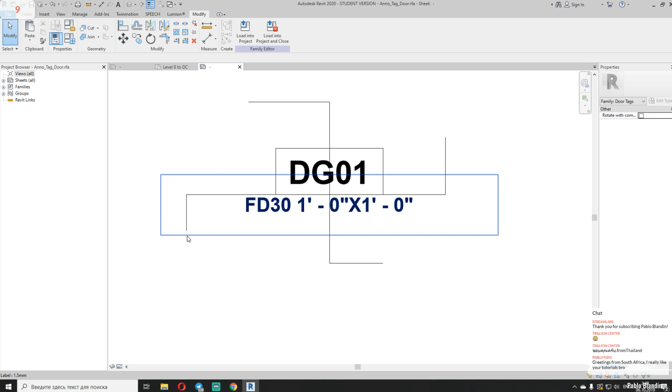This is not nice, I'm sorry. It's actually like this, I want to make the square. I will use dimension. Here is 5 millimeters only, and here is 5 millimeters only. Here is the 5, not here, it will be 3, and here will be 4.

And now I want to create the chamfer. Let's make the chamfer radius only 1. Done. Let's load it inside of the project and override it. Actually, it's too big, let's make it smaller.

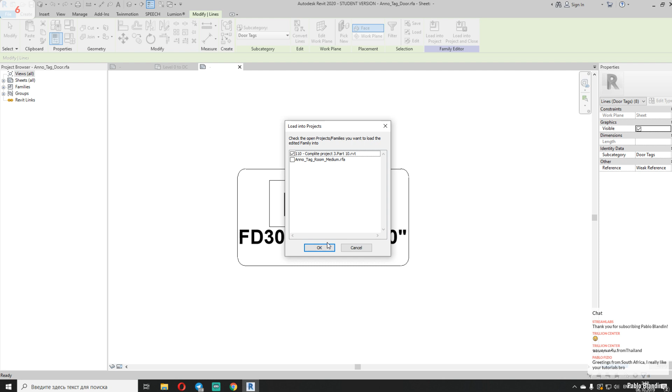Let's use it to move. One more. And let's load it inside of the project again. Actually, it's also big, because my text size here is much bigger than in the project. This sometimes happens. I think this will be exactly what we want.

We will check it right now. Yeah, pretty close, as you can see. Done, I will leave it as it is.

So as you can see, now we get the nice number. We know the type of this door, but as you can see, this is just 5. What does 5 mean? We can make this a special parameter. Just select it, use the prefix, and call it door, DR. Or if you don't want to use that, you can use the type name or family name as you want, but I will just use the number.

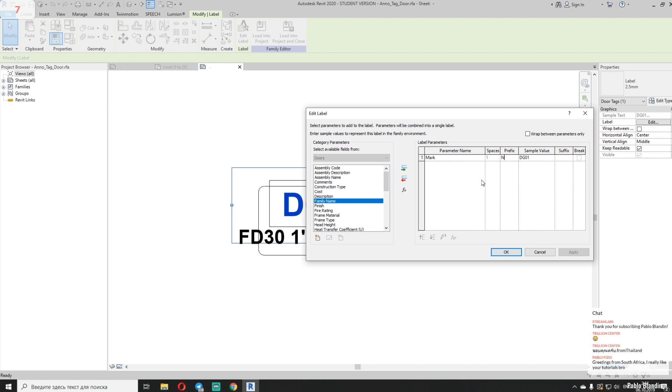Let's say OK. Let's load it inside of the project. I will load with closed, and override. Number 5. Okay, done. And now we can create it everywhere.

This door we will do later on. So let's tag everything. Just go to Annotate, Tag All. Here you should choose the door tag, and let's use our tag, the Anno tag door number and rating. Okay, tag all doors.

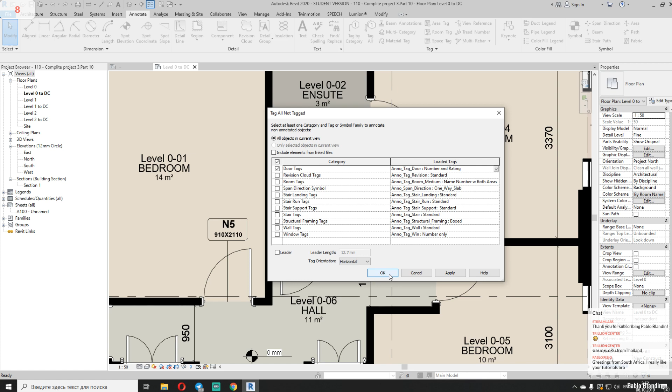Let's say okay. Now everywhere we have the number tagging, as you can see. Let's make it better than we have right now. Sometimes you can rotate it if you need it. For example, here I want to rotate it. You can unselect the leader line if you want, and you don't have it right now. I will delete here, I don't need it.

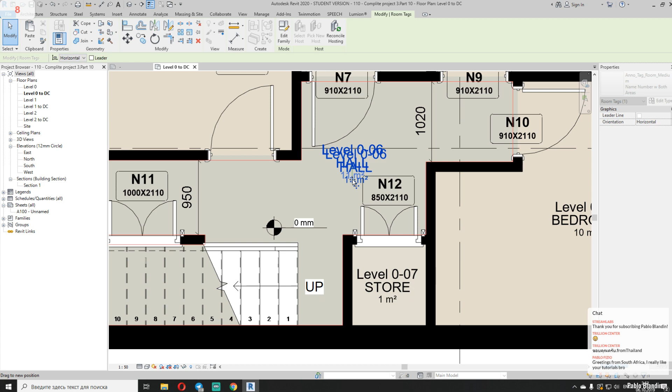And let's make it for that one too, like this. Just go ahead, try to make it more interesting, more better, more readable, because this is documentation, it should be readable. Okay, one more time, like this, and here.

This door I will delete right now because we don't have the special parameters for that, and as you can see, we are already under the finish.

So, as you can see, we have a lot of parameters now today. Now I will finish level 1, and I think we finish the stream for today. So what do you think, guys, about this stream today? Door, fire rating, let's say okay, and I will use that one.

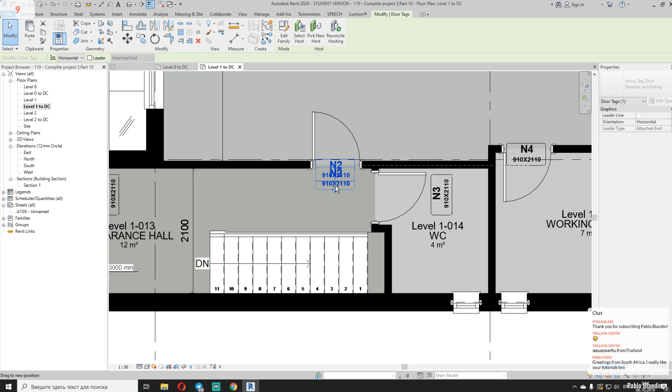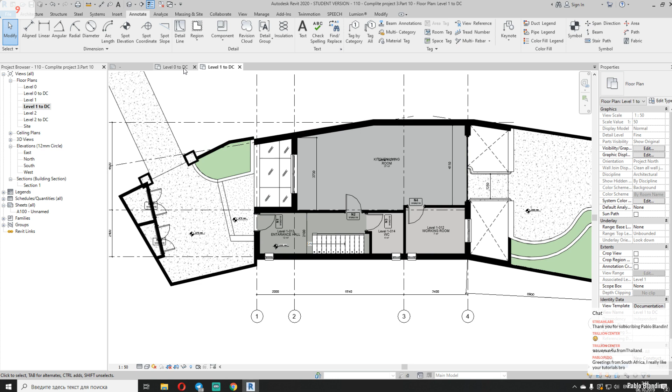So we finish with doors finally. The same thing you can do with the windows. You just select, you can create the windows. I will use the tag category, the window one. I will select that, and we have, for example, boxed. We can also create parameters for our window if you want, of course. But don't try to put everything in one list, because now we have a lot of information and we don't need to put everything here anymore.

This is already enough. So I think in the next tutorial, I will check my schedule. We did tagging, and we did the rooms. So stairs done, rooms done, tagging done. What's under tagging? The plans we finished. We need section, elevation, and details. And the schedule, we don't have any schedule right now.

So in the next tutorial and next stream, we will make the schedule for all elements in Revit, and we will make the documentation for section, elevation, and details. So do you like this idea or no? If you have some idea, let me know. I will include it in my plan for the next stream.